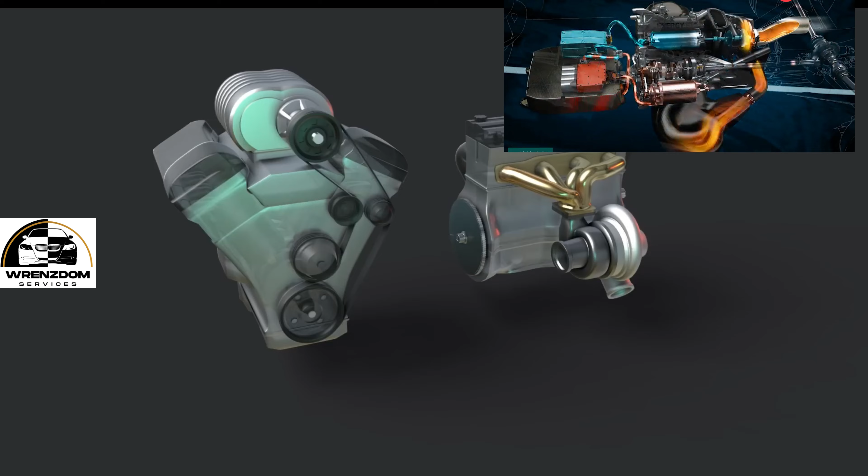The basic function of both superchargers and turbos is to deliver more air to an engine's internal combustion process. The main distinction between the two is this: superchargers are mechanically powered, often by connection to the engine crankshaft, while turbos are powered by engine exhaust gas.

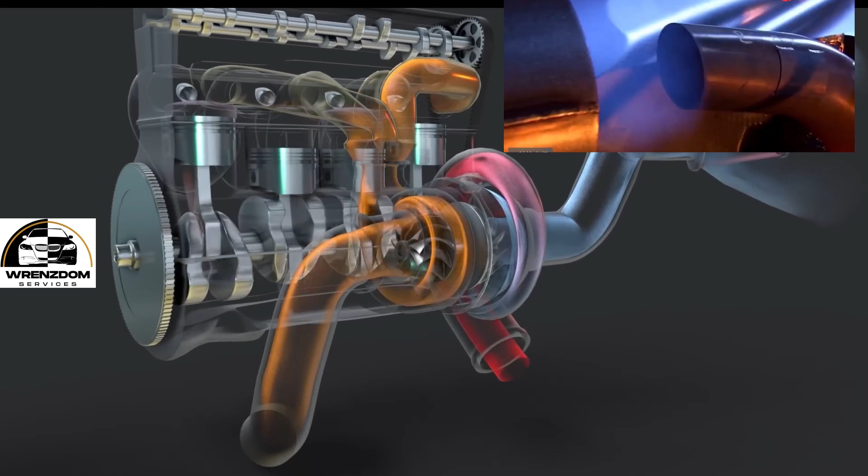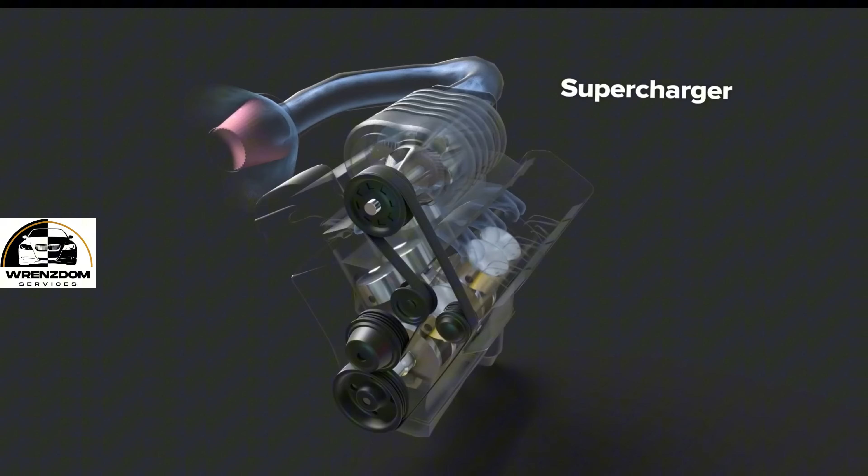Let's look at how each unit works, starting with the supercharger. The supercharger type shown here sits on top of the air intake manifold. A serpentine belt transfers crankshaft power to the supercharger pulley. Pulley diameter and construction is an easily accessible way to quickly alter supercharger performance characteristics.

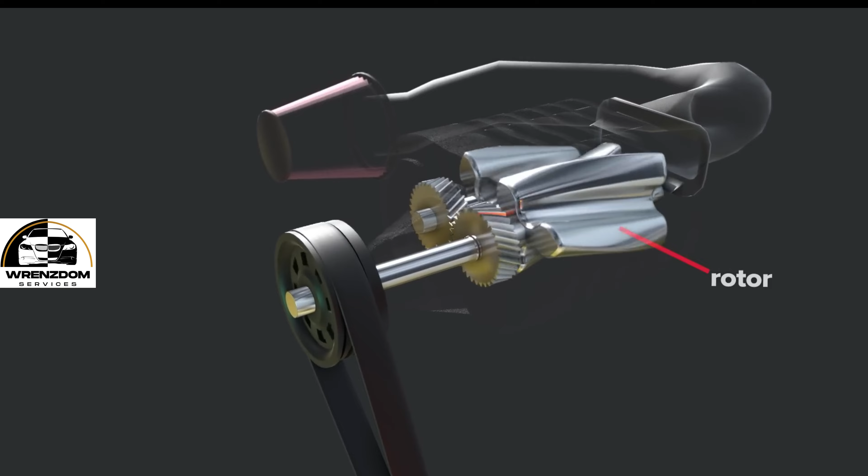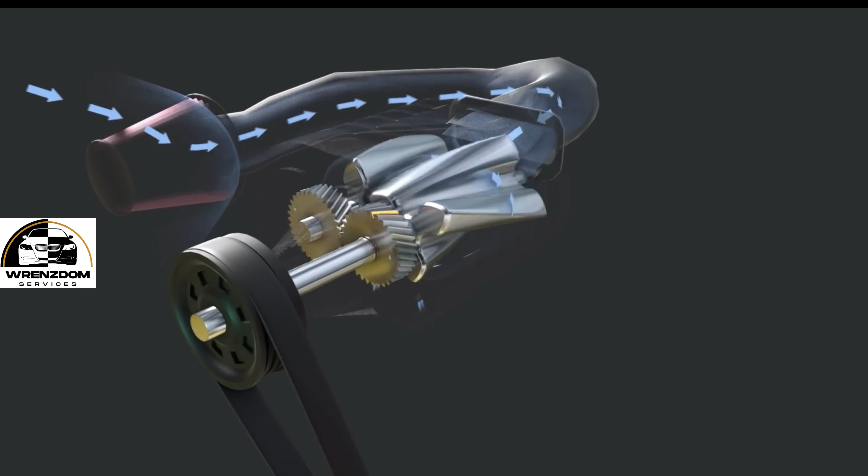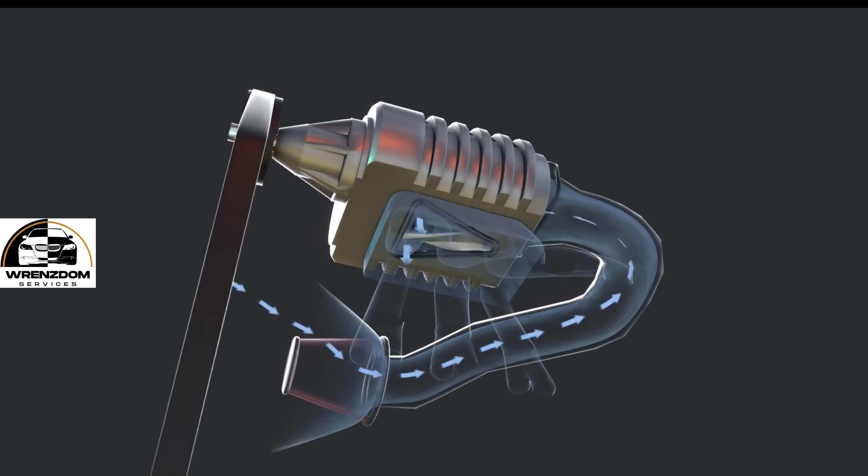A gear drive system delivers incoming power to opposing rotors. Outside air enters through the air filter and intake pipe. Interlocking rotors force air through the supercharger. The long fins or ridges that span the length of the rotor shaft are called lobes. Air exits the supercharger through a specially shaped discharge port at the bottom of the housing.

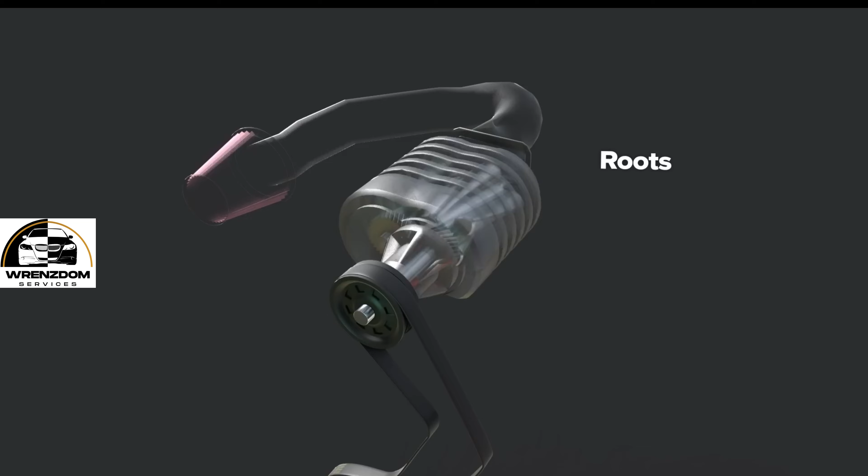Here are a few common supercharger types. Roots: the Roots type supercharger saw its first automobile application in 1900. The term blower or blown engine originates from the Roots supercharger's basic function as an air blower, as opposed to other designs that compress air.

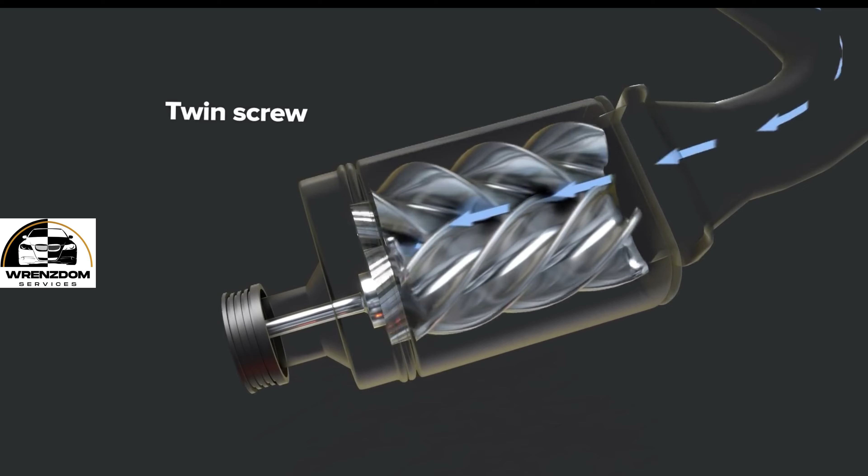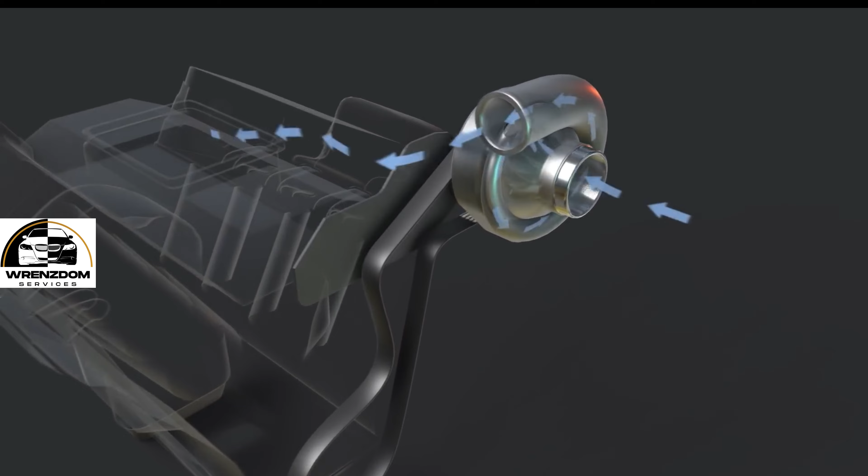Twin screw: Twin screw type superchargers feature complex rotors with intricately designed lobes that compress air as it moves through the unit. This increased complexity results in better performance, but also higher manufacturing cost. Centrifugal: Centrifugal superchargers have much in common with the turbo design concept, though they are still mechanically driven. They produce an exponential power curve and are often tuned to make full boost at engine redline.

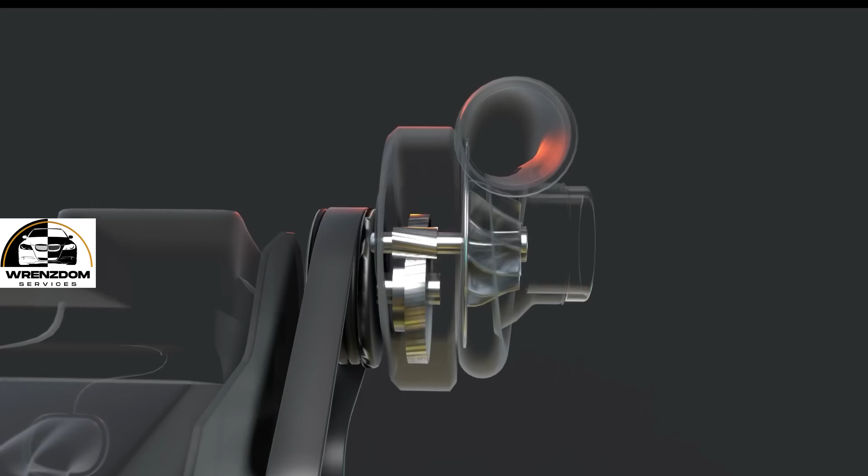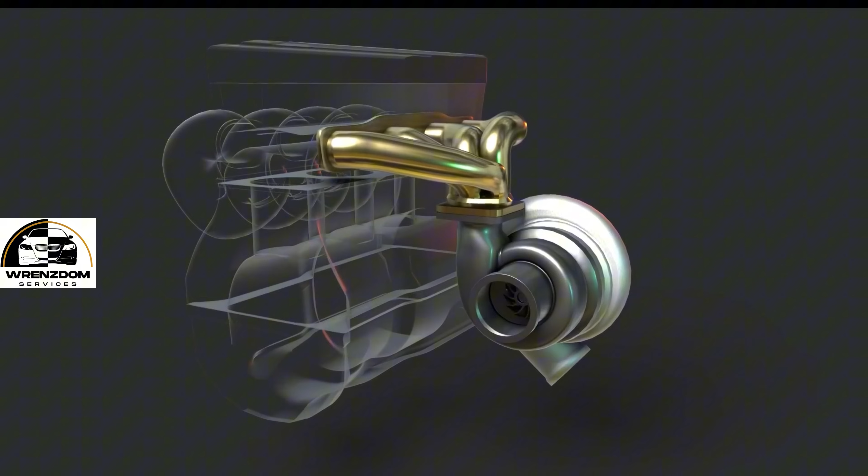Now let's look at how turbochargers work. The turbo connects to the engine exhaust system. In turbo setups, the exhaust manifold may be specially designed for turbo placement and to handle increased heat and pressure. The turbo has two separate compartments called the turbine section and the compressor section.

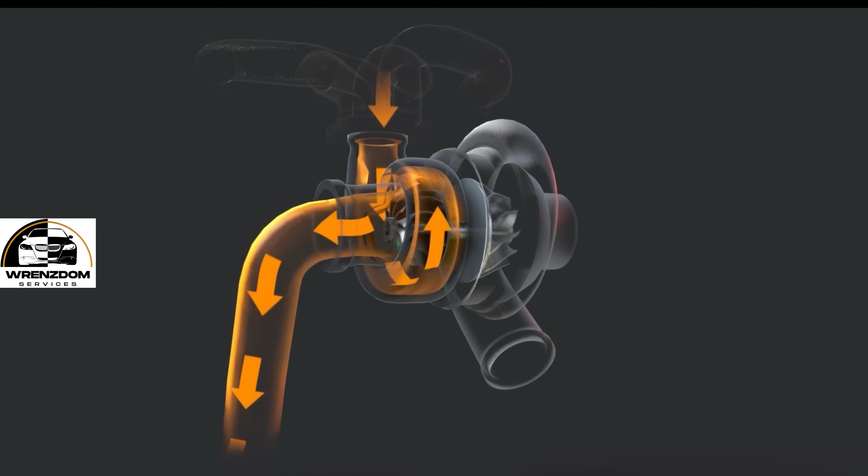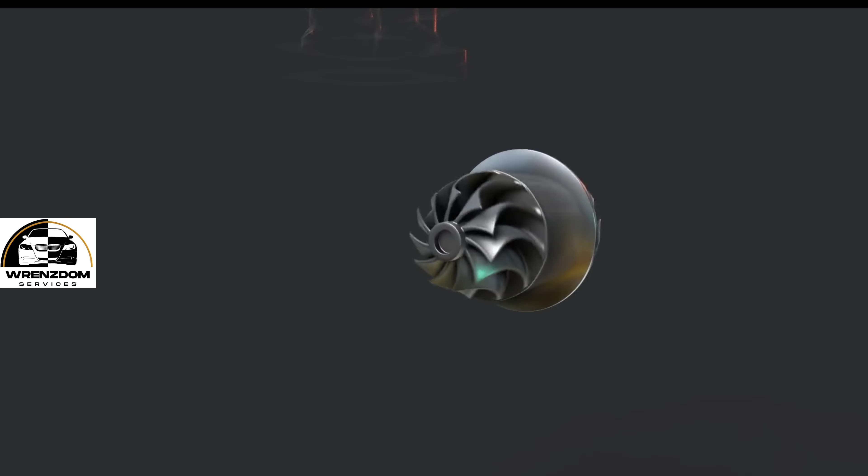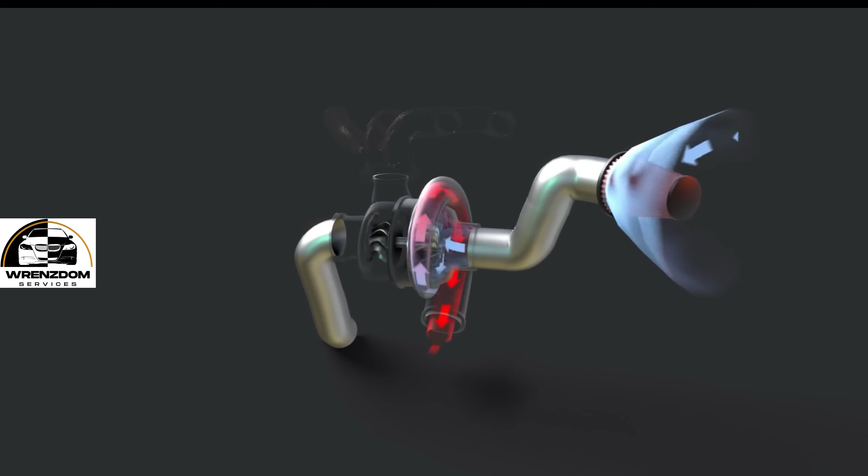Exhaust flows through the turbine section as exhaust heat and pressure drive the turbine or exhaust wheel. A sealed shaft connects the exhaust wheel to the compressor wheel. The compressor wheel pulls air in through the air filter and intake pipe. Its specially shaped fins force air through an increasingly smaller chamber, building compression.

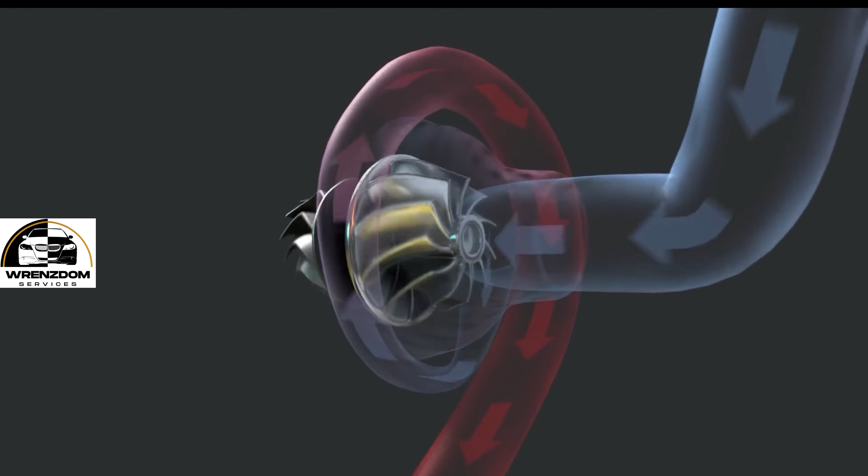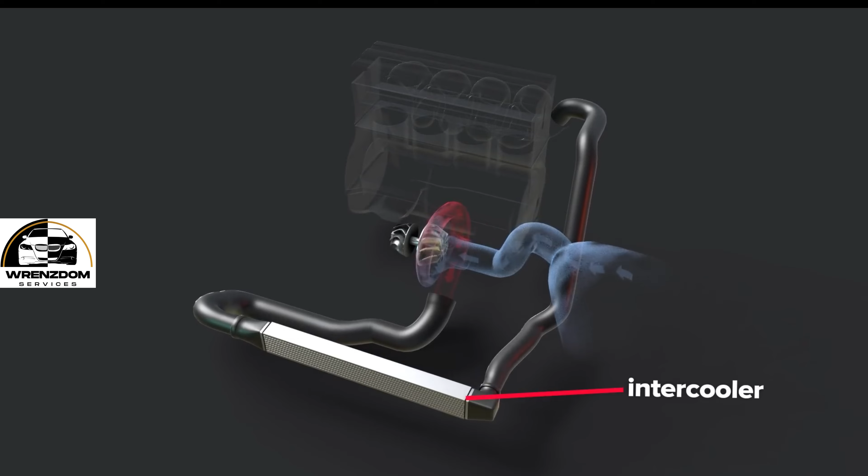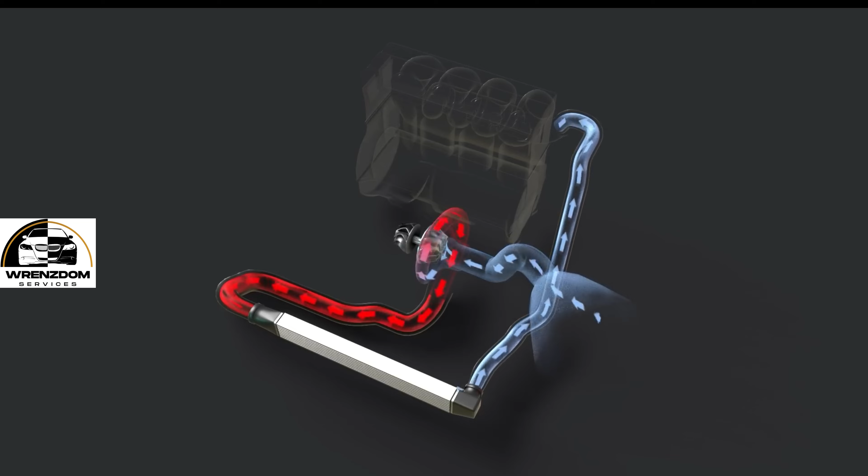Air gets hot during intake and compression, so most turbo setups have an intercooler between the turbo and engine intake to get air back down to ambient temperatures. Cooler air has greater density, serving the goal of forcing more air into the engine. The intercooler works something like a radiator. Hot air passes through internal tubes as outside air rushes by for cooling.

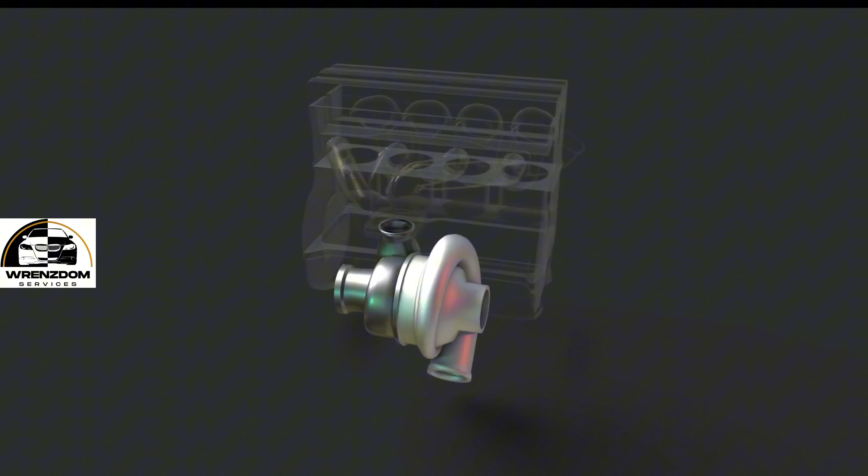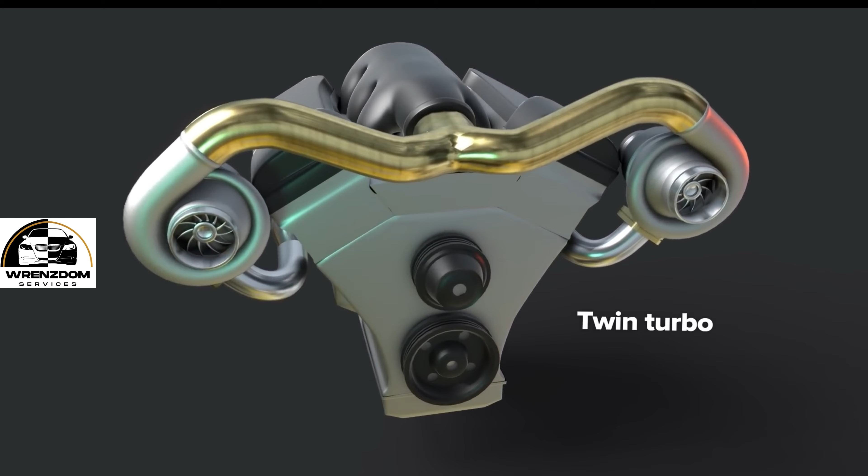Here are some common turbo designs. The single turbo, shown here, where all exhaust flows through a single turbocharger. Twin turbo: a setup with two turbochargers, for example on a 6-cylinder engine with one turbo for each cylinder bank.

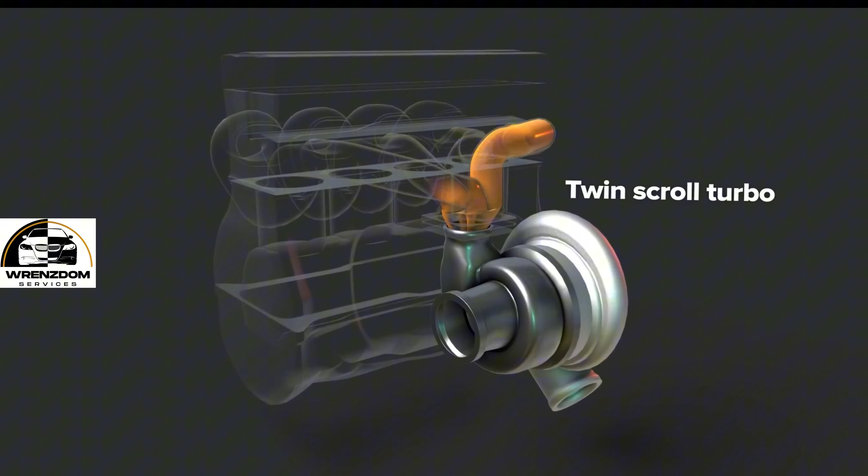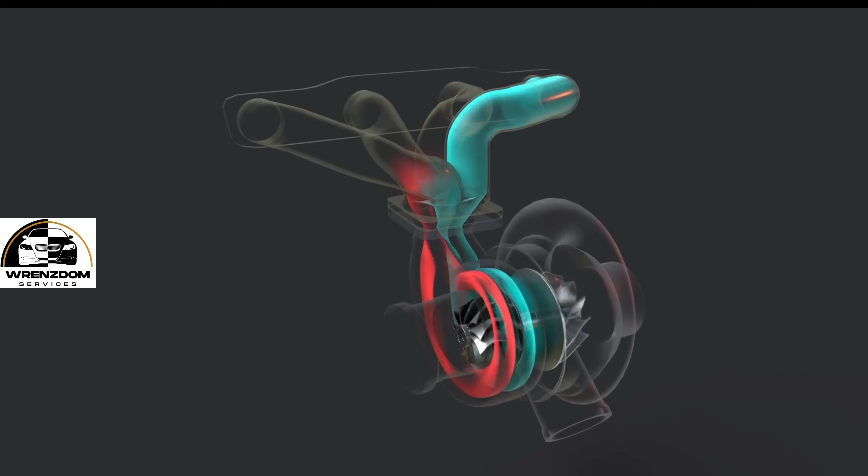Twin scroll turbo: exhaust exits the cylinder in a pulse, with a high pressure section followed by low pressure. Twin scroll turbos separate cylinders into pairs so that exhaust pulse waves do not interfere with each other, and a continuous stream of maximum pressure exhaust reaches the turbine.

Now let's compare superchargers and turbos in very general terms. Again, superchargers are powered by mechanical energy, for example by connection to an engine's crankshaft, while turbos are powered by otherwise wasted heat energy from engine exhaust.

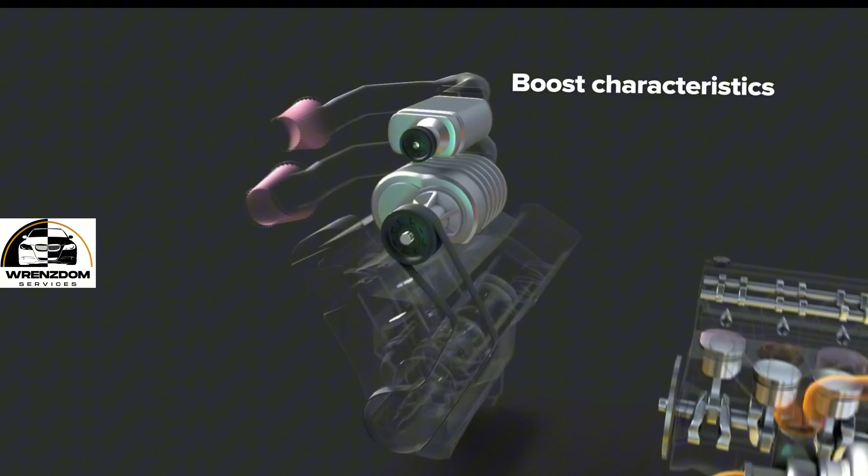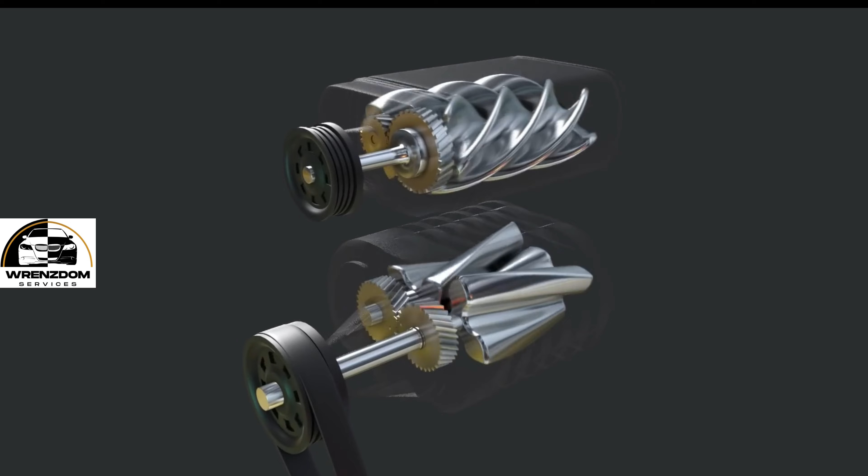Boost characteristics: Roots and twin-screw superchargers have positive displacement, meaning that they move the same amount of air for each engine revolution, regardless of RPM. This also means that they can make boost immediately, even at very low RPMs, and have a fairly linear power curve. Turbo setups produce an exponential power curve.

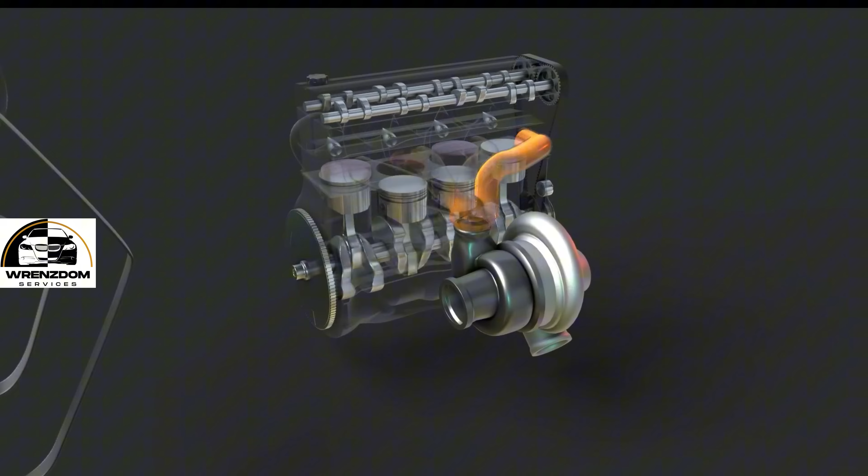Since they are powered by exhaust, turbos take time to build turbine speed and pressure before producing usable boost. This delay is called turbo lag.

Efficiency: superchargers take power to make power, and an average setup can require 40 to 60 horsepower to function. This doesn't mean that overall engine efficiency is always sacrificed, as some setups can increase fuel economy when not driven aggressively. Though turbos do increase back pressure on the engine, they derive power primarily from otherwise wasted exhaust heat as opposed to exhaust flow pressure.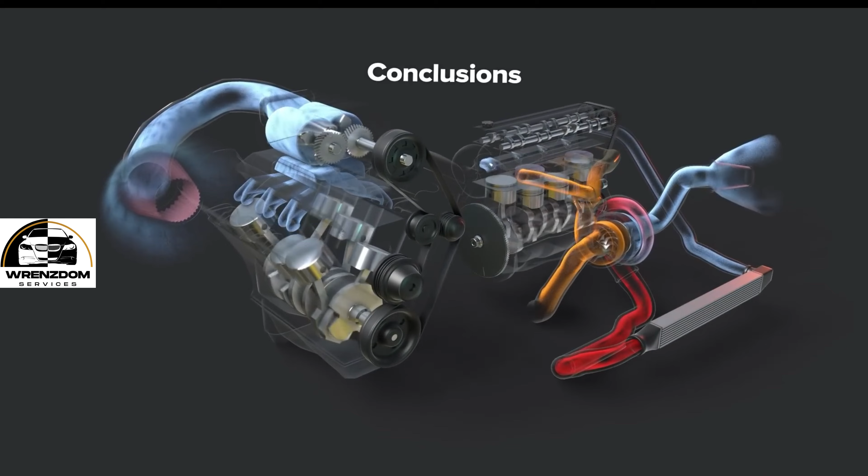In conclusion, superchargers can be a less complex, less expensive way to increase engine performance. They're usually easier to tune and maintain. They can be ideal in applications that require predictable boost at all RPMs.

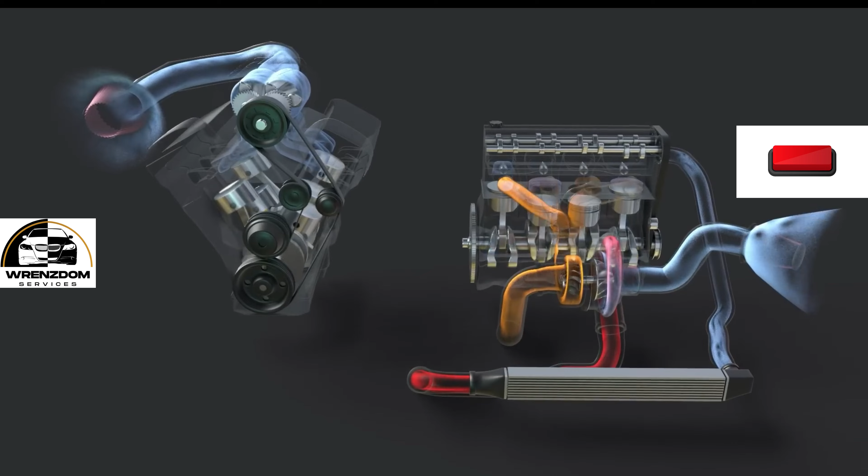Turbos might require more peripheral parts like oil and vacuum lines, an intercooler, custom exhaust manifolds and exhaust piping, and so on. Turbos can require more skill to properly configure. However, a well-tuned turbo system may be able to produce boost more efficiently and in greater quantity than a supercharger.